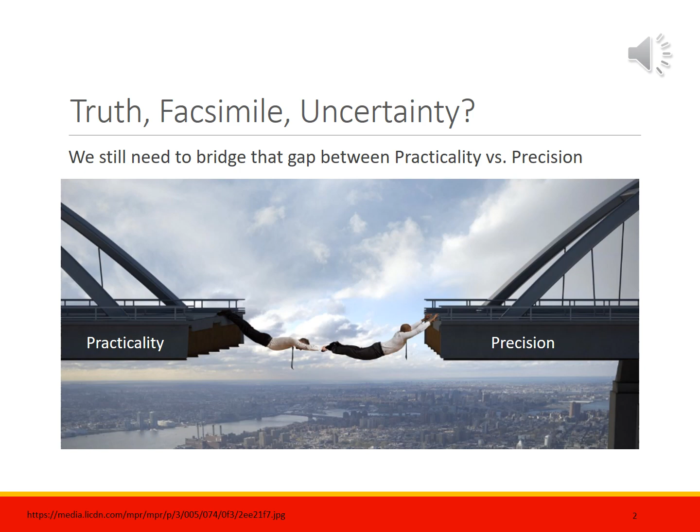When we make measurements, every step of the measurement process is fraught with uncertainty. We will learn how to uncover and deal with this measurement uncertainty, but the fact remains that even though we can become paralyzed with measurement uncertainty, we still have jobs to do. We need to find practical solutions while maintaining a linkage back to precise measurement truth.

But you can never know exactly the truth of a distance or a mass or a unit of time or whatever. As John Lennon lamented back in 1971, "All I want is the truth. Just give me some truth, man." Well, let's see if we can help.

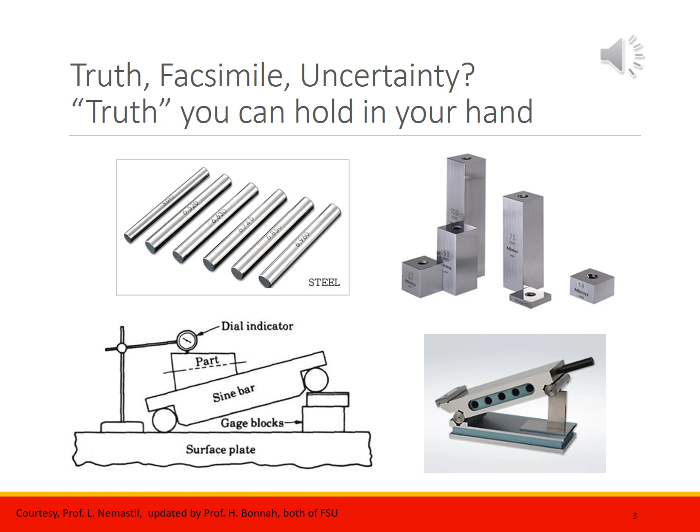We'll see this slide both in our book and the classroom lecture. But what I want to ever so briefly mention here is how a production gauge can and must be able to trace its measurement uncertainty all the way back to a national standard of some kind. You may be using a fixture or a variables gauge or heck, even a set of micrometers. In any of these cases, you will want to know that you have some access to the truth of a measurement.

So a natural question is, who cares? I mean, really, isn't it possible to just be close enough? Do I have to flog myself against the hallowed halls of NIST every time I want to make a measurement? And the short answer is no. No, you don't. In fact, for most of our recorded history, such traceability wasn't considered necessary. As long as Pharaoh's arm was available, you could just go and ask him. Well, maybe if you were a peasant you couldn't, but I'll elaborate more on that in our book.

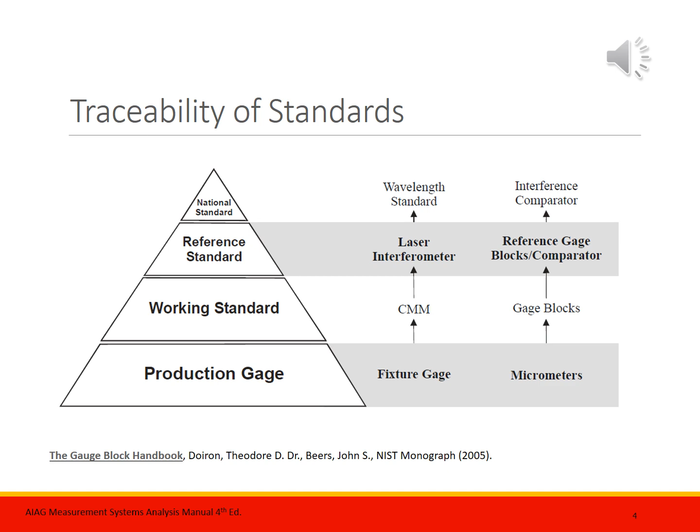What I have next here, though, is maybe another example of a time that traceability and standards were considered not necessary. Way back when, like in the 18th century and before, right? When we needed something, we made it. Arts and crafts style. Everything was custom made, custom fit. If something broke or needed to be refurbished or mended, well, we more than likely didn't have a spare parts bin to go to because there weren't really any spare parts. And if there was a spare part, it likely wasn't interchangeable with the part that failed.

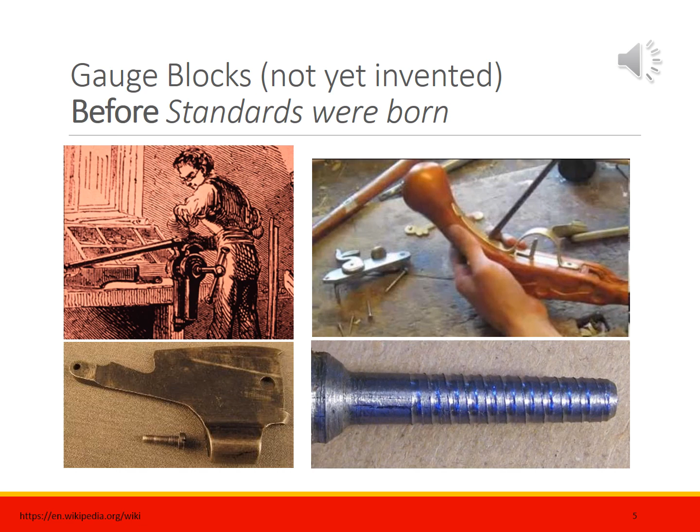We see here a depiction of a gunsmith toiling away in his gun shop. An example of his toil is pictured here. It's a simple wood screw. If he needed a particular wood screw for a particular hole, he'd custom make the screw to fit it. If you could look at very old firearms or even look at some old armor up close, you will see many fasteners. But somehow, most are custom and all are slightly different. However, all of this custom work would produce masterful works of art. One could even classify them as industrial art.

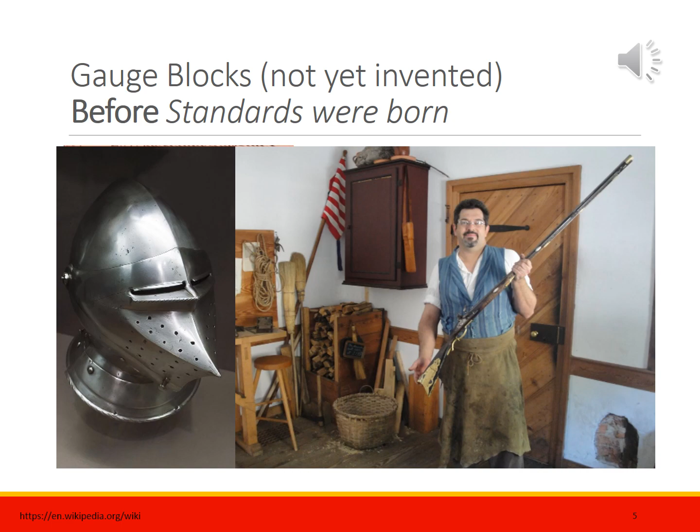By the end of the 19th century, the idea of interchangeable parts, popularized by Eli Whitney, not invented, but popularized, had been accepted by industrial nations as the model for industrial manufacturing. One of the drawbacks to this new system, though, was in order to control the size of parts, numerous gauges were needed to check the parts and set the calibrations of measurement instruments.

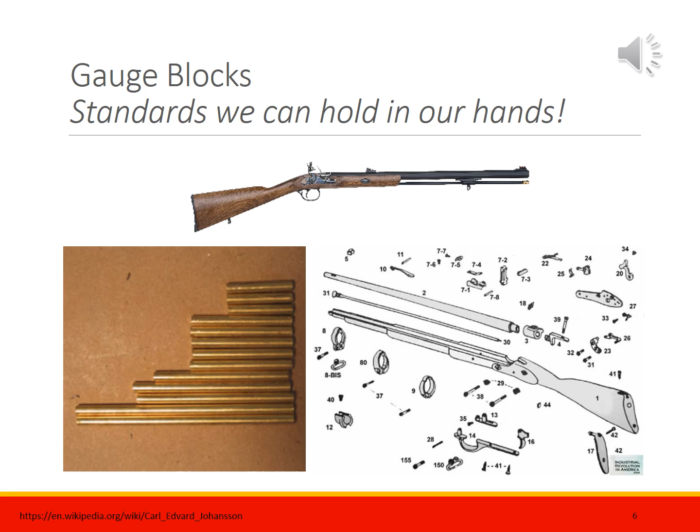Additionally, let's say you were a supplier of parts or tools or whatever. Your measurement gauges would somehow need to be related to those of your customers' measurement gauges. The parts you would produce would need to properly fit, be repeatable, and interchangeable with your customers' parts. As usual, fix one problem, another one pops up. Well, it's what keeps us engineers busy, right?

Enter Carl Edvard Johansson. Born 1864, died 1943. He was a Swedish inventor and a scientist.

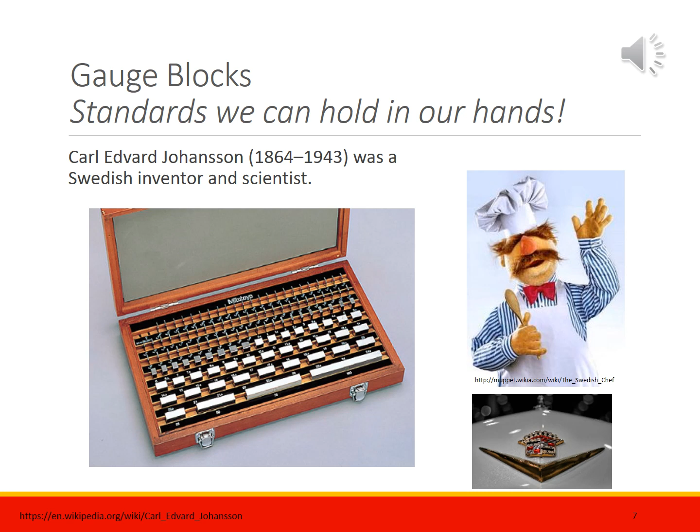Here's Carl Johansson. Okay. Now, Johansson invented the gauge block set, also known as Jo blocks, Johansson gauge blocks. You see pictured here a very nice set of blocks. Once stacked together, they can establish a certain desired height to a known uncertainty or tolerance.

Now, Johansson's idea, first formulated in 1896, was that a small set of gauges could be combined to form composite gauges that could reduce the number of gauges needed in the shop. For example, let's say you had 4 gauges of sizes 1, 2, 4, and 8 millimeters. You can combine these in any combination, and then all of the millimeter sizes from 1 to 15 millimeters can be made from only these 4 gauges.

Now, he was granted his first Swedish patent on May 2nd, 1901. Remember that date, 1901. It was a Swedish patent, number 17017, called Gauge Block Sets for Precision Measurement. He formed the Swedish company C.E. Johansson AB in Sweden in 1911. The first Johansson gauge block set in America was sold to Henry M. Leland at Cadillac automobile, around 1908.

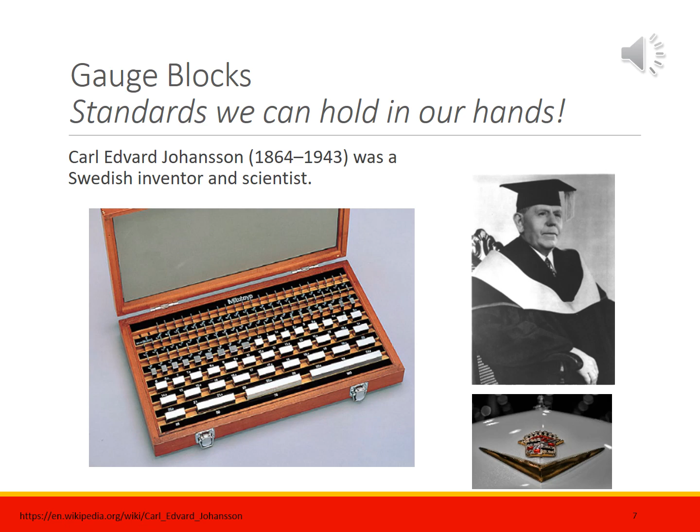Eventually, his gauge block sets would form the basis for establishing linkage to the various national measurement labs around the world, including NIST, well, the precursor of NIST, which was the U.S. National Bureau of Standards, which was founded in, wait for it, 1901. A coincidence? No. The entire industrialized world was grappling with the problems of standards, traceability, and interchangeability right around this time.

Johansson found that if 2 opposite faces of a piece of steel were lapped very flat and parallel, 2 blocks would stick together when they were slid together with a very small amount of grease between them. This is called ringing. The width of this ringing layer is about 25 nanometers, and it was so small for the tolerances needed at the time that the block lengths could be added together with no correction for interface thickness.

Eventually, the ringing layer was defined to be part of the length of the block, allowing the use of an unlimited number of rings or blocks without correction for the size of the ringing layer. In the U.S., this idea was enthusiastically adopted by Henry Ford, and from his example, the use of gauge blocks was eventually adopted as the primary transfer standard for length in industry.

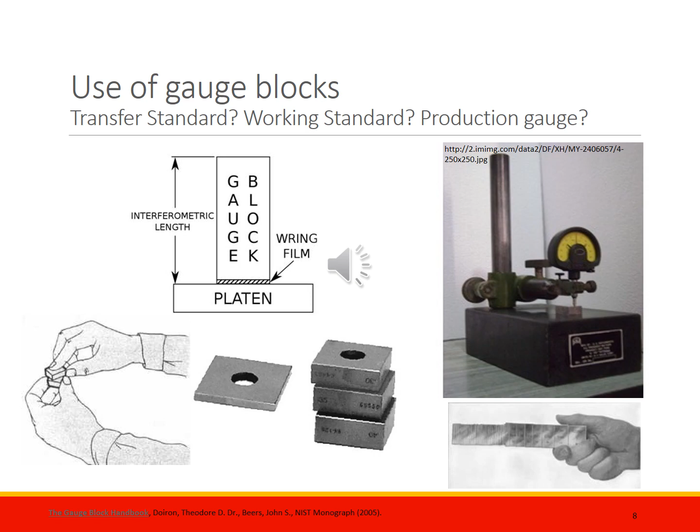So what are gauge pins? Well, gauge pins are another form of standard. They don't stack so well, so you'll typically have many pin sets to bridge your needed check sizes. Similarly though, gauge pins are used to establish a reference or transfer standard.

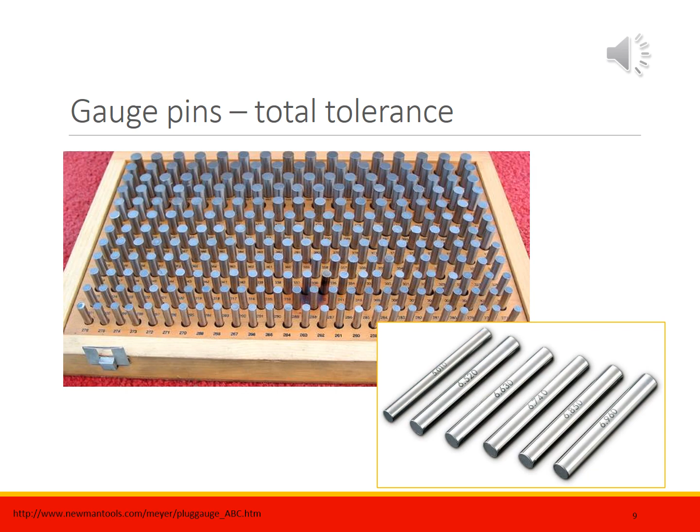Best practice is that when using a set of micrometers to make a measurement, the first thing you do is grab a gauge pin of the nominal size you wish to measure and make sure the micrometers are capable of recreating faithfully that measurement. Again, we'll talk a bit more about that in a minute or so.

Both gauge blocks and gauge pins come in classes that reflect the manufacturing tolerance with which they were produced. Their actual size deviation from nominal might be better than the stated tolerance, but never worse. You'll learn in Chapter 2 of our book that tolerance is a form of uncertainty.

There will also be bias from true value or the reference value. This tells you which side of the nominal target the tolerance is applied to. The idea of bias is also introduced in our book in Chapter 2, so do make sure you read Chapter 2 in our book prior to class.

As in most cases in life, the more you're willing to spend, the better tool you'll have at your disposal. Here listed are the general guidelines for gauge pin tolerance for a gauge pin that is 0.338 inches in diameter. Our book includes a table for gauge block tolerance as well as gauge pin tolerance. As for gauge pins, though, the lowest tolerance class pin, which means the greatest tolerance, the greatest uncertainty, is the class ZZ pin. These are pretty cheap, and you'd expect a total tolerance for our stated size pin here to be around 0.0002 of an inch.

One important note here too, as you are bebopping around the plant measuring stuff and checking stuff, be very mindful of whose gauge pins you've grabbed. Let's say you're measuring production processes and you want to grab a set of micrometers and you go to the tool room and they got Class Z gauge pins, and they'll probably be sufficient as long as they're under surveillance and calibrated by your QC department.

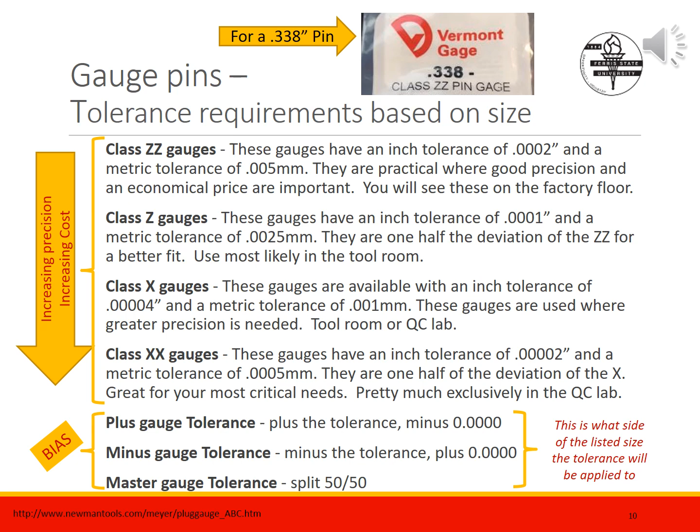Here we see a 0.338 minus Class ZZ gauge pin. If you can read the packaging in the resolution of our YouTube video here, you can see that on the packaging it is traceable to NIST. The class calls out how much manufacturing tolerance is allowable for this pin. For a Class ZZ pin of 0.338 inches, we have a total tolerance of size allowed of

0.0002 or 0.2. In the most general of terms, that is equivalent to saying that our pin is made to a diameter of 0.338 inches plus or minus 0.0001. And plus or minus 0.0001, 1/10, equals a total tolerance of 0.0002 or 0.2. An allowable size tolerance is a linear relationship in that the larger the gauge pin, or block for that matter, the larger the manufacturer's tolerance can be. You can just hop down the table and see this. We see too the ever tighter allowable tolerances for the ever better class of pins going from right to left. This table is in your book, by the way.

The fact that it is a 0.338 minus pin means that the pin can be no bigger than 0.338 and that all the tolerance is to the minus side. This means that the OD of the pin pictured here must fall between 0.338 and 0.3378. The gauge maker has biased the allowable tolerance to the low side of the nominal dimension of this pin. Why would you do that? Well, because when we choose to use this pin to verify the max material condition of a hole, that'd be the smallest hole, we can be assured that we never accept a hole that is smaller in size. It's kind of like an insurance policy of sorts. We'll cover this a bit more in detail in the book and in future lectures.

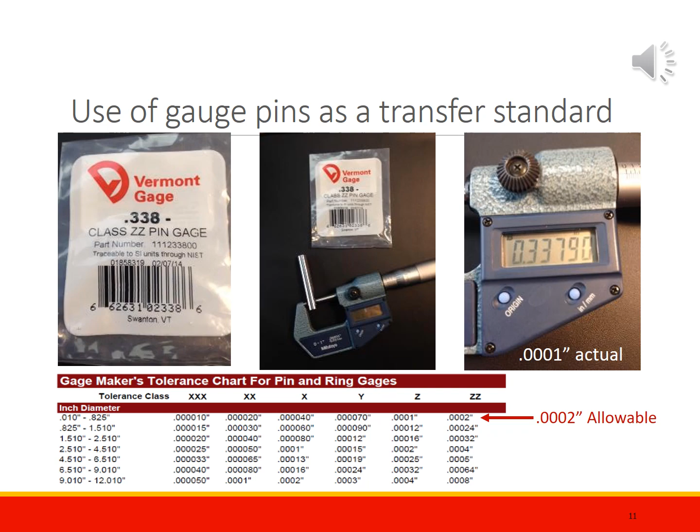One application where gauge pins and gauge blocks commingle is something known as a sine plate. Let's say we want to grind an angled surface, or maybe the part's already been made and we want to measure a ground or machined angle. How does one do this? Do we A, look for a skyhook, or B, find a left-handed screwdriver along with a stout nibbling cup, or C, turn to the mysterious sine plate to levitate our precious angled ground part? The answer is C, the mysterious sine plate to levitate our precious angled ground part.

And it's not so mysterious as long as you can chant the mystic trigonometric mantra of SOH CAH TOA. Say it with me once. SOH CAH TOA. Yeah. We'll focus our energies on the first part of the mystic chant. Sine equals opposite over hypotenuse. SOH.

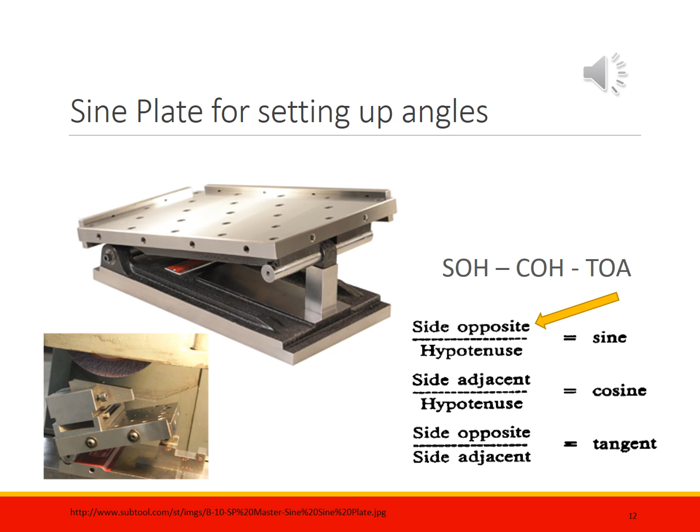Quick programming note. The sketch we're going to use here for the next couple of slides is provided by Longwood University. It's a real public university. It's not for profit and the like. And I guess Farmville is a real place and not just a Facebook game of some kind. Who knew?

All right, so to set up a sine plate to place a workpiece at an angle requires a sine bar, a couple of gauge pins, and most of the time sine bars come with their own pins, a surface plate, and a gauge block set. You will most likely have either a 5-inch or 10-inch sine bar, wherein the distance listed is the center line to center line of the gauge pins that you'd use with the sine bar.

Now, if your sine bar has lost its gauge pins, don't fret. As long as your gauge pins are reasonably close together in terms of diameter, and they're pretty close to the pins that came with the sine bar, they will have little effect on the hypotenuse. However, if the gauge pins are different, then you will have to add in their effect on the gauge block stack height. If they're the same size, you're cool. If they're different, you have to compensate for the effect they would have on the gauge block stack height.

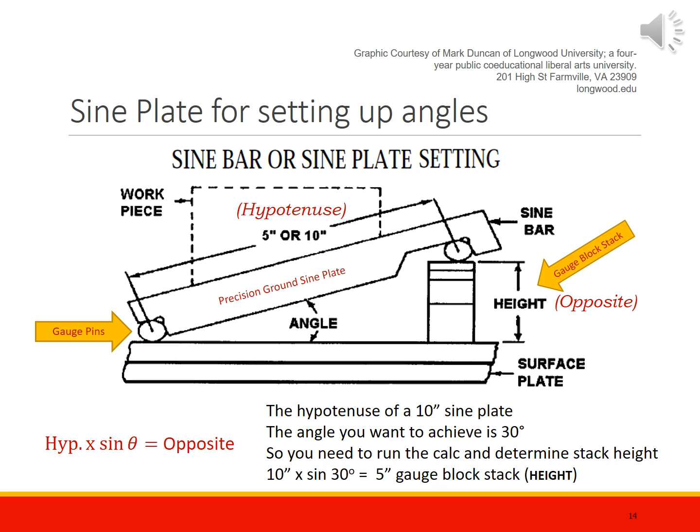Okay, last bit here is to mention thermal effects on gauge blocks and gauge pins. Many tool rooms and most QC labs are climate controlled. However, many manufacturing floors are not. In the winter, there's usually temperature parity between the tool room, the QC lab, and the factory floor. However, in the summer in Michigan, different story. So let's say your transfer standards are in the tool room, which is kept at about 70 degrees Fahrenheit. You dutifully set up your sine plate with your gauge block stack to achieve a 30-degree check angle. You then take your sine plate check fixture out to the manufacturing floor, which happens to be at 80 degrees

Fahrenheit. This is where material science and physics take over, and your gauge block stack grows in height because of thermal expansion. I mean, metals heat up, right? And they expand. In fact, pretty much everything expands when it heats up. Something about energetic molecules and the presence of increased energy due to heat. In fact, only water seems to not follow the rules. Once cooled, when water hits 39 degrees Fahrenheit, it begins to expand as it gets colder. And good thing too, because if it followed the rules, life on Earth might not exist. Really. And if this is news to you, ask me in class when we meet again to explain.

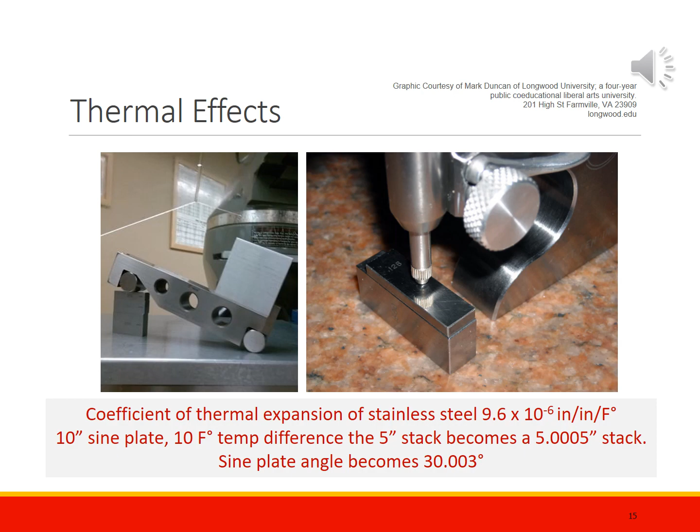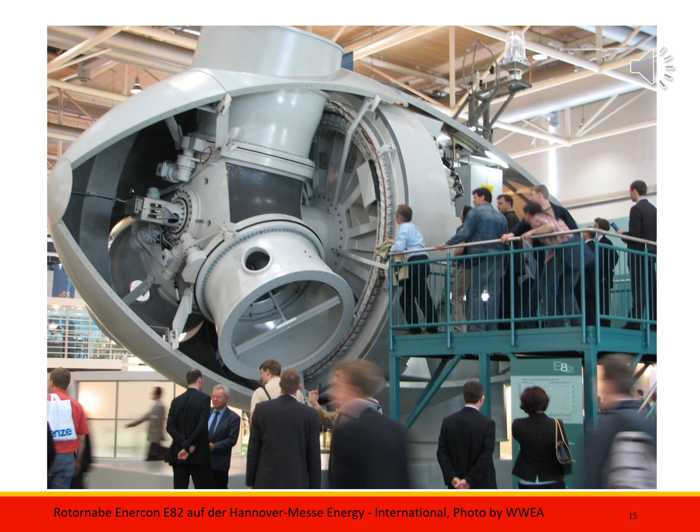Okay, folks, this ends the first of a number of online lectures I will provide for you part of this semester to try and help fill in the gaps. Don't forget to read Chapter 2 before class and also slog through the sine bar homework. Also, don't forget to wrap up your lab reports and also your variance homework and report.